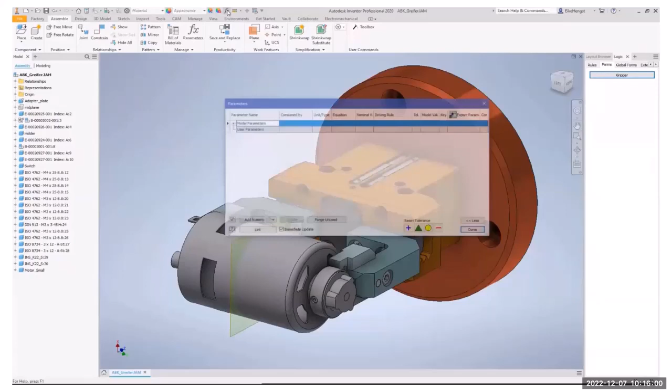We can then go a stage further. We actually create our own custom parameters. Now this allows us to add, for example, a command that we're going to use for the holes. How many holes are in the backplate? And what material are they going to be made of?

And these are additional parameters. They're not actually part of the model at the moment. We're just putting in whatever we need, and we're changing the unit type to either numerical or text. We can then add those changes into the iLogic script.

And here you can see we're adding that parameter, so the number of holes that we added, using the predefined snippet that we've dragged in from the left-hand side. And we're just going to say that equals holes. Holes was the name we gave the parameter.

And then we're just going to say it's either going to be short, and we're going to change the size, and then also the length. So you can see it may look complicated, but once you actually see what's going on in the background, it's actually very, very easy to do.

And the thing is, when you compare how long this is taking with how long it would take to completely remodel that assembly with different components for each version that we want, you're talking minutes here. You could be taking hours to do it the other way around.

So once we finish that, we've got our commands, as it were, or our script. We can then add that to our window that we've created. And again, we can fully customize this. We can make it look a little bit more friendly. We can drag things around, change the tabs, change how many pages we've got.

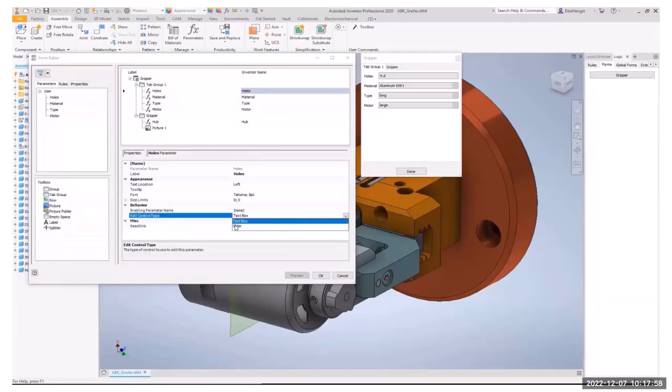So anyway, we're going to choose whether we want sliders or text here. Now when we open our control window, we've got the materials we can change, the sizes, whether the backplate's got 4 holes, 6 holes, or 8 holes. Just by dragging those sliders around, using the drop downs that we used in the command, we can completely reconfigure that assembly.

Now imagine how many permutations we had there. How long would that take to remodel all of those into a different assembly? You're talking days, probably. This has took us minutes. So very, very easy to use and can save an awful lot of time.

Interoperability is another big one, particularly from Revit to Inventor. Previously, if you wanted to share a CAD file from AutoCAD, for example, you'd make it a DXF so other people can read it, which means you've lost all the integrity of the file. If you wanted to put an Inventor file into Revit, you'd have to put it out as a STEP file or something like that, and again you're losing the data you've put into that component.

By using the AnyCAD system, we can literally bring in, for example, a Revit file into Inventor, use that in our Inventor model to position components, look for clashes, which we're going to do in a second, and then push the Inventor model back to Revit. So if any of these change, the corresponding CAD package is also going to update. If we make a change in Revit, the Inventor model or assembly will also update. So you've got that bi-directional link between the files and the CAD packages.

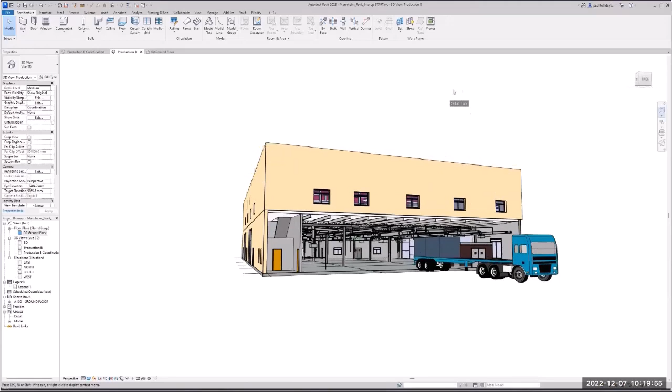Here we've got an example where we've got a factory in Revit, and we've done all the machine assembly in Inventor, and we just want to make sure everything fits in. First, let's have a quick look round so you can see the size of the model. We've got one bay that we've done all the machines for in Inventor, and we just want to place this in and see if it works. So what we now need to do is export our Revit model, just this area, the bay we're working on, into Inventor, and then load the Inventor files to make sure there's no clashes.

Again, very, very easy, all done on the cloud as well. We can share the file. This is our Inventor model, the working bay with all the machinery that we want to put into our factory.

All we have to do now is import or place our Revit model. We're not doing any modifications to the file type, we're not bringing in a converted file. This is the actual Revit file that we've just been looking at in Revit. So once we open that, it's going to give us a choice of the view that we want, because again, it's understanding the Revit views we've selected.

So a little window pops up, and using the drop down, all of the views that we had in our Revit model are available for us to bring through into Inventor. We're just going to go for our simplified version, so we don't need the entire factory, just the work area or the cell that we're working in.

Once that comes in, we're just going to constrain that to the 0, 0, 0 point in the CAD model, so we've got continuity of the placement of the two components. Again, it's very easy - just a right click, place on the 0, 0, 0, and that's now going to be in the right position. We can now unfreeze our Inventor model, just turn those on so we can see what's happening.

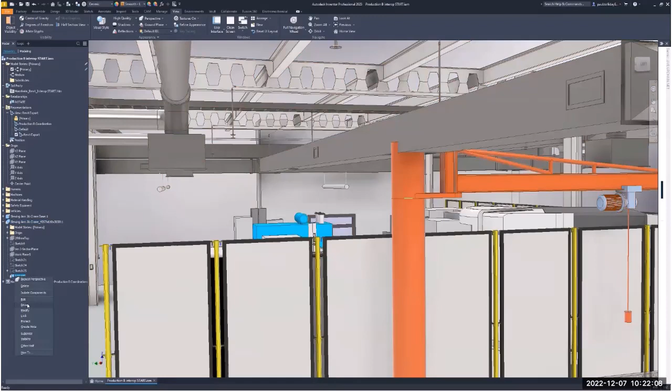So just by using the driven constraints in Inventor, we can activate the crane, and then we can see if it clashes anywhere else in our Revit model. That looks pretty good. It's only that one area, that one piece of ducting, that's causing us the problem.

So what can we do about that? Normally, this would be where you'd have to send an email, a screen print to the person that's in the Revit model or the architectural model and say, I need this change. Well, what we can do is actually send our Inventor model to Revit so we can do the change live in the Revit model.

So what we can do is simplify, because obviously we don't need every nut, bolt, screw and washer that is in our Inventor model. We want a simplified version that gives us just the size and shape of the components. Here we can choose at the bottom to export directly to the Revit file format. So we're not exporting a step file or a dumb solid, as they call it. We're actually using the Inventor model, which also gives us a link, so anything we now change in Revit to cure this problem will also update in Inventor. So we've got that bi-directional link between the two CAD packages.

So back in Revit, all we're going to say is we want to insert our linked file now. And there we have our Inventor model in the Revit model.

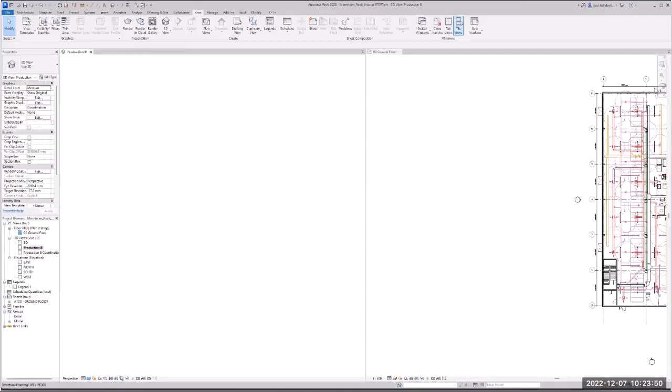So we can make the change now very quickly. We're just going to come to our 2D layout. I'll tile the view so you can see what's happening. So in real time here and live, we're going to go to the right-hand window. We're going to find our assembly that we've just placed in from Inventor. And if we select it, you'll see it highlights on the left-hand side, so we know we've got the correct assembly. We can then see the piece of ducting that's causing the problem.

So all we have to do is activate it. You can see it highlighted now on the left-hand side as well in the 3D model. And then we're just going to change the dimension and push that across by a couple of meters, make that 3000 millimeters, 3 meters. And we can now see we've cured the problem, we've moved the ducting, and it's updated everything in Revit.

If we then go back to Inventor, we'll see, once that's saved, then we can come back into Inventor. We'll see a little lightning strike at the top of the screen which says your model is out of date. Automatically, it's seen that we've made changes. So we just click on the lightning strike. It's going to update the model with the latest version that we've just changed in Revit, and then update the Inventor file. So we can see we've got a complete round trip.

And again, just thinking how much time that would take if we hadn't done that, and we were emailing files off to people and marked up drawings. It's going to take a lot of time and a lot of effort. So you can see, hopefully, how that works a little bit better.

Next thing, again, time-consuming things. If you've got an assembly and you may be looking for information from a client or a supplier, you would be sending out either marked up drawings, emailing them, or PDF files. And if you're really brave, you'd actually be sending them your CAD data, which is obviously a risk because then they can modify things, and your CAD data, your intellectual property, could be changed.

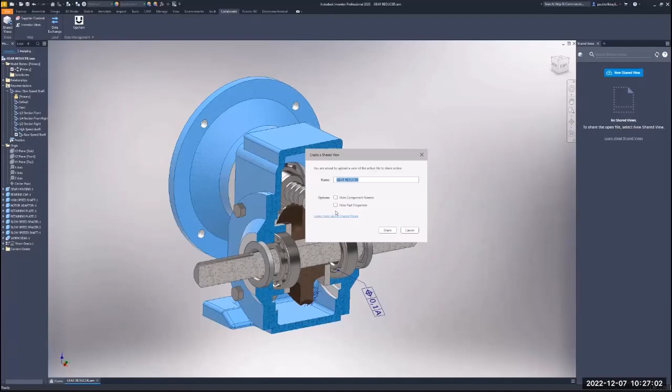And again, you can do this in the Vault if you wanted to. But we're going to create a shared view. All we have to do is say we want to create a new shared view. We can give it a name, and choose whether we hide component names and also the properties of those components. So it's up to you, the level of information you give to the person you're sending this to. I'm just going to say everything, and I'm going to copy the link it's produced, and email that across in a second.

But just so you can see what's happening in the background, we can go for a live view. So it's going to fire up Internet Explorer, load up the file, and here we can now interact with it. So we can zoom, pan, spin it around, and look at pre-saved views if we had them. I've only got the standard view.

But also in our model browser, because we allowed this, we can actually look at individual parts. We can either select it and zoom in, and it's going to highlight the part and ghost out the other parts. So we can pan and zoom around all of those components and find particular parts.

And once we've done that, we can go back to our original model if we want, and actually turn off the visibility of other components. So we might want to see what's inside the model. We can simply select it and turn off the visibility.

But nothing we're doing here can affect your CAD model. So this is purely for visual reference, which makes the files very, very safe to work with. Once we've done that, we can then send that to the person that's interested.

Once we finish with our views, I do get a bit carried away with these, it's actually quite good fun messing about with it, but we can do section views, as I said. We'll just show an example of that. We can explode the assembly.

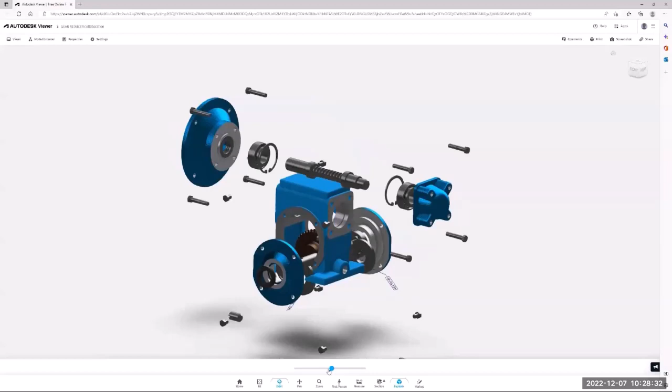And we just do a section. When you're creating your section view, you can drag it real time, same as you would do in Inventor. Not only can we drag it out, we can spin the cutting plane around, and again get the exact section view that we want.

Once we're happy with that, just going to close that down. Now I'm going to generate an email, and send it to myself. So just put my name in there. And then we're going to paste the link that was generated for us in Inventor.

And we're just going to ask the person that we're sending this to take a look, just to make sure the dimensions are correct. Paste the link in, hit send, and the email gets sent.

Once I get notification come through, I can then open the email that's just been sent to me. It's got the link there. Click on the link and it opens up the web browser. Now, again, as I say, this doesn't have to be on your PC. It could be on your iPhone, your iPad, any other tablet you're working with, as long as you've got an internet connection. So now we've got that, we can come in here.

We're going to just make a little markup so we can see what needs to be looked at, and create a section view. Then we're going to put some annotation in here as well via our markup. I'm just going to drag an area around the area of concern. We're going to add a little arrow, and then put some text just to say we want to look at the dimensions or the tolerance build-up in this assembly. We've got a spacer in there, and we want to make sure that bearing doesn't push against the spacer.

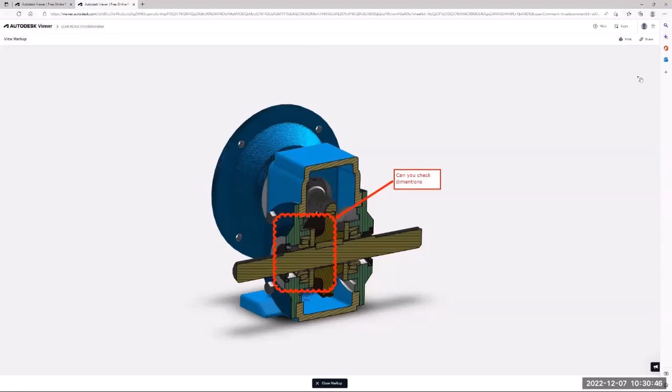Once I've created my copy there on my markup, when I come back into Inventor, just do a refresh, and we can see that we've now got a comment that has been added to our original markup. So just to refresh to make sure we've got the latest one, if we now click on there, the markup we just created can be viewed.

So I've now got the information back from the client, the customer, the engineer, whoever it may be that I've sent that information to. And I can see that they've said, okay, we've got a problem with this area. Can you just check on the dimensions and give instructions?

So moving forward in time, we say, okay, we've had a look at this. Well, I'm quite happy with it. We can simply say that our comment is resolved. It takes it away from live comments, but also keeps it as a reminder, so you've got a history for up to 30 days of what's actually changed. The information has gone backwards and forwards between the two people that are doing this.

Seem useful? Yeah. So any questions, or if you're getting bored, just tell me.

Okay, so moving on then, the extended capabilities. So Inventor tolerance analysis, the thing we were just talking about with our previous video we just looked at, factory design utilities, Nastran, Inventor CAM, and Inventor Nesting.

Does anybody use any of these at the moment? Yep, you do. Which one? I went for nesting. Yeah, we have used it for nesting. Yeah, we have a possibility. Okay, that's good.

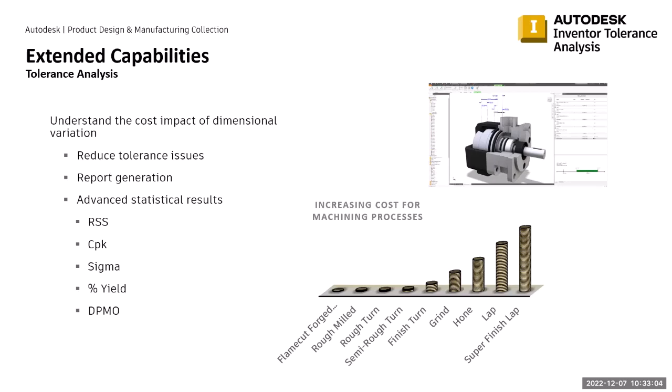So what we can do is use our tolerance analysis. We've got our same component, and as in our previous markup, we just saw someone's worried about the dimensions. So once we go into tolerance analysis, we can create what is called a stack up. And the first thing it's going to ask us is, well, where's the critical dimension that you want to talk about or you want to check?

And what we're doing is checking the gap between the spacer and the casing and the bearing in this instance. By selecting that, it will now look at all the constraints that are along that shaft and that component, and it will automatically find all of the constraints that could affect the dimension or the placement of that component. So that gives us our set, as it were.

We can then come across into the tolerance analysis area, and we actually see what the tolerances are going to be. So we've got our worst case scenario at the bottom. I'm going to actually set a target here. So I want it to be plus or minus, and we just add 0.25 into our dialog there. Just let that happen.

Now that's going to tell me what's the chances, worst case scenario, of none of these components fitting together. Now we can actually find the parts that are causing the problem. So straight away we can see gear housing and the gear 000 IAM are causing the biggest problem. So they've probably got the tighter tolerance on there that can't be achieved, or it could be too loose even.

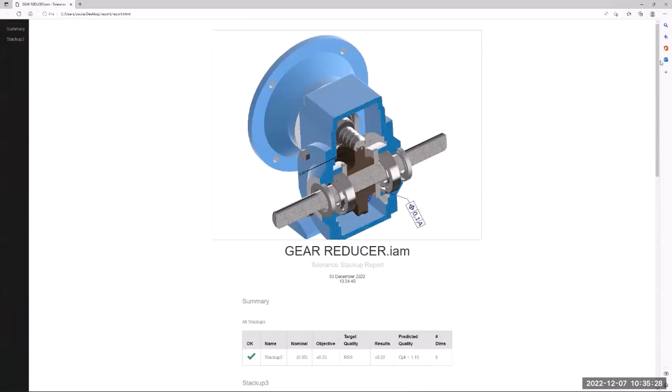We can then output a report that gives us all of the information and why we made this decision. We could forward this to the supplier, and then you've effectively solved the problem very, very quickly. Obviously, that's a very top level guide through it. There's an awful lot more you can do in there, and if you wanted to see more, give me a shout afterwards and we can go into a bit more depth.

One question. Is it possible to connect it with the cost analysis? Because all these tolerances affect the cost, and some of them, yeah, like you showed this diagram at the beginning. Is it possible to use it?

There would be a way if you exported it into an Excel spreadsheet, so you can put in rules in your spreadsheet that could update from the information that's coming from there. So yeah, you could do that. I can show you afterwards, we'll do a little walkthrough.

And second question, this tolerance analysis, it means that all these 3D dimensions should be, let's say, defined in 3D? Yeah, what you can do, you can obviously use the dimensions that you already have in your model, your parametric dimensions, but you can use 3D annotation now as well.

So you've got your 3D dimensions, so you can see on there I've got the one dimension, but if you're using 3D annotations, that will then update dynamically with the changes that you've made to the tolerance analysis, which will then also update in your drawings as well, via the 3D dimensions. So yeah, I'd say I can show you more of that in detail afterwards.

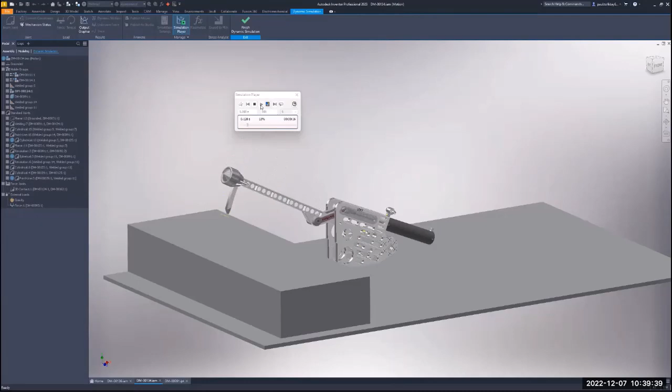Once it hits the deck, we can stop the motion, because we don't need any more motion at that particular point. Then we're going to go to our output graph, and we can see the moment of impact on that analysis, on that axe. So all we can do is search for the maximum force that was applied to the end of that axe.

And then we're going to export all of those settings, all those forces into the 3D model, which is the axe arm. Once we've done that, and again, we're still just in normal Inventor analysis here, we're going to go to our standard Inventor analysis.

Take a little time to catch up.

So into stress analysis, we're going to create a new study. And because it understands the simulation we've just done and we exported the files, we've got a button we can press and just say, bring through all of the motion loads from the simulation analysis. So now it's not a case of us guessing where the forces are going to be. These are the forces that were generated from a motion simulation.

Once we've gone through that, we can add materials, which we've done in the background. I'm just going to take off the pointers. We can mesh the entire model, and then we're going to do our simulation. Just take a couple of seconds.

And once we get the results, we can now see very little red, keeping it simple, on the model. So, yep, that's going to survive one hit. So this is the point where we say, okay, how many hits can I get out of this? And this is where we would normally be exporting the files to another package.

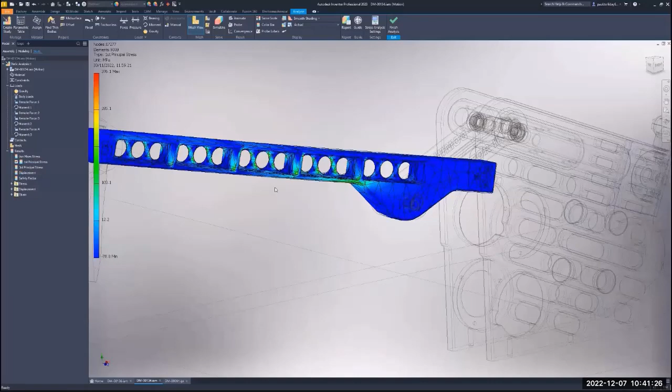What we can do now, though, is go to Nastran in CAD built into Inventor. And because we've already done all of the analysis on here, we can bring through all of that data into Nastran, so we haven't got to recreate all of that information. Just wait for this to update.

So now, into Nastran, we'll see the information down the left-hand side that it's going to bring through that's already embedded in the model. All we need to do now is make a few changes to what we actually want this to do for us. So we're going to create a simulation.

Takes a little while to catch up here. And here we're going to define the material it's going to be made of. And then we want to understand what's happening with that material.

So we're going to go from our static analysis, which is the default. And now we're going to tell it that we want to do our fatigue analysis on that component.

So we're still making very little changes to what's happening in the background here. With all of the main criteria, the forces, etc., have been added via the stress we've already done. We can then look at the fatigue of the material, and we can tell it what we actually want to do here.

Once that's done, this table is basically telling Nastran that we want to have 3 stages: 0, halfway through, and complete. And it's going to be fully back, fully down, fully back. So it's going to do a cycle, effectively, of the axe moving in its range of motion.

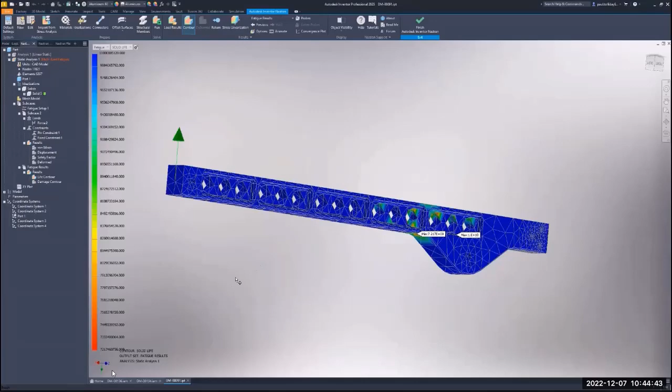So we actually could be in the stage where we're stopping ourselves from over-engineering now. We could bring that back. I'm not going to do more than 10,000 hits for this axe in this competition, so as long as it lasts that long, that's all I need. So you can see really, really time saving.

Again, that is just scratching the surface of what Nastran can do, but it gives you an idea of how it works in Inventor with the products you've already got in there. I'm doing this for time.

Other areas you've got is in the CAM side of things. You've got multi-axis operations, adaptive clearing, turning and milling. Pretty standard for all of the tooling environments there. I think Rickard is going to do quite a lot of talking about the capabilities of CAM in Fusion later on.

But again, you've got exactly the same information here, the same benefits, because everything's built into the program. Once you've set up your tool paths etc., you may change the model, make a slight change to a parameter. This is then going to update and refresh and show you where you've got problems if you have any. So again, massive time savers.

Nesting. So again, you could probably tell me about this as well. Very, very useful. Do you find it useful when you've used it so far? Yeah, well, how you use it itself.

And again, it's one of those things when you're dealing with sheet metal components. Everyone models them, great, okay, but at some point we do need to cut these out from a sheet of steel or plastic or whatever it may be. So we want to make the most efficient use of this material. We can actually put the parts in and say this is going to be the most efficient use of that material. That can then be generated into the cutting paths in the CAM system, and you export the whole package directly to your CNC or whatever machine or laser cutter that you're working with.

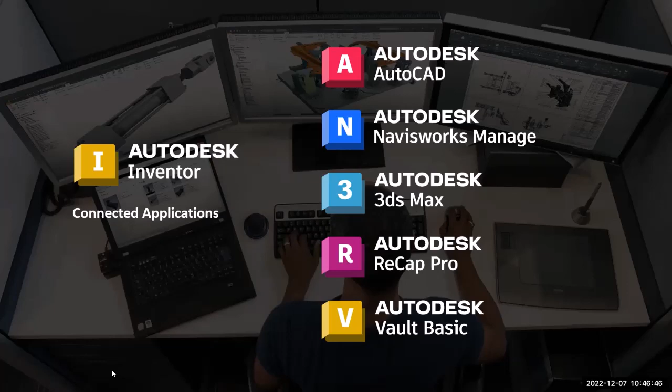Connected applications. As we've said before, Inventor works seamlessly with AutoCAD, Navisworks Manage, 3ds Max, ReCap Pro, and Vault Basic. Also, it's compatible with Vault Professional as well. But to go through some of those, these are the interesting areas.

So AutoCAD and Inventor, again, this is a time-saving thing. We may have a lot of drawings that we've done in AutoCAD. We move across to Inventor. What happens to all that data? Have you got to recreate that from scratch? Well, no, you haven't. What you can do is bring through the AutoCAD DWG into Inventor and use that to create your 3D model. And again, working on this relationship between two packages, if you then make a change to the AutoCAD drawing, because we've got a link in Inventor to that drawing, it will update your 3D model automatically if you want it to.

And again, you have a choice here where the lightning strike icon comes up and says this has changed. You can actually say, well, actually, I know that's changed, I don't want my model to change, and we can leave it as it is, or we can hit the update button and it will remodel the 3D solid for us automatically.

Moving on to Navisworks. This is a great piece of software. Basically, if you're doing your factory layout, as we showed in the beginning here when doing the 3D between architectural and Inventor, but also if you're doing the AutoCAD to Inventor factory design layout, we can then put this into Navisworks, which allows us to do things like walking around, check everything's okay, clash detection for our components, and also we can work out how long it's going to take to build stages of build that we want for the 3D model.

Just to show you, here we have Navisworks - get the two mixed up. From our 3D model, it doesn't matter if it's come from Revit, Inventor, or AutoCAD factory design, we can walk around, but more importantly select areas where we want to check for clashes between components. By selecting our area, it's now going to show us the areas that have a problem. So we see our ducting is infringing on the area we don't want anything inside.

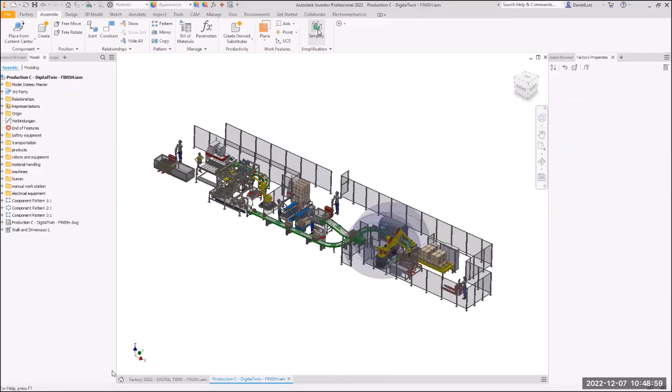We can come straight back into our Inventor and have a look at the area that's going to be a problem. We'll do a shorter version of what we did earlier, but we're going to export this now into Revit, because the Revit model is the part causing the problem, not the Inventor model. So exactly as before, we export it out, take it into Revit, and use Revit to make the changes.

I'll skip through this bit quite quickly, because then we'll go back in and show you what's happened in the final product.

Back in Revit, we brought our model through. We're going to do a refresh just to make sure we've got the latest version in there. As before, we're going to find the parts causing our problem, move them in the Revit model, and then update the Inventor model after that. It could be a case of changing dimensions, moving a component, or revolving it, whatever causes the result we want.

We're just going to drag that across, move it from our production cell, and move the other components completely out of the way. Once we've done that, same as before, we're going to save it, then do the refresh. We've got the lightning strike in Inventor, going to update our model. Once it's updated, we can come back in the other direction. Let's make this update.

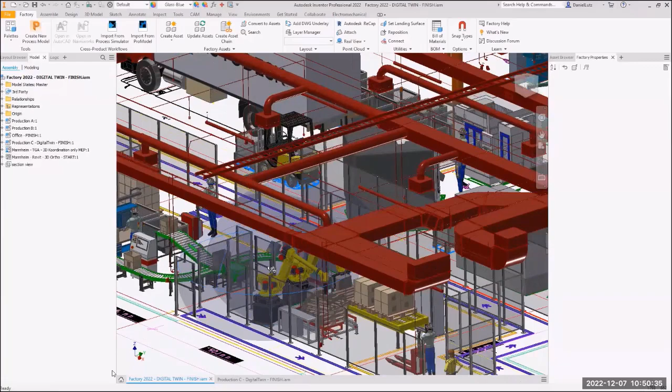So there we can see we've actually made the change, so we can see the effect in our 3D model. Come back into Navisworks, we can refresh the clash analysis or detection we did earlier, and we'll now see that we've cured the problem we had initially. And there we see, the clash is gone. It's going to now just give us information on any other clashes, so we can do the same procedure to go through those as well.

Another area is electrical. We've got AutoCAD Electrical, which we can use for electrical design, schematics, etc. We can then bring that into Inventor, do 3D models of that, do cable routing, cable and harness, and nail board drawings and schematics directly from Inventor. But again, we've got that link with the original AutoCAD Electrical functionality, so any changes made there will push forward through into Inventor.

Getting towards the end now, but bringing a lot of these things together, what we've got is a laser scanner inside a building, which can create a point cloud, and we can then bring that through using ReCap Pro. We can measure, mark up, and bring it into the 3D CAD model. So the factory layout we've done, we can bring that point cloud in, and then do clash detection from the physical properties of the building used in the scan with the machinery and ducting, etc., that we're putting in from the model.

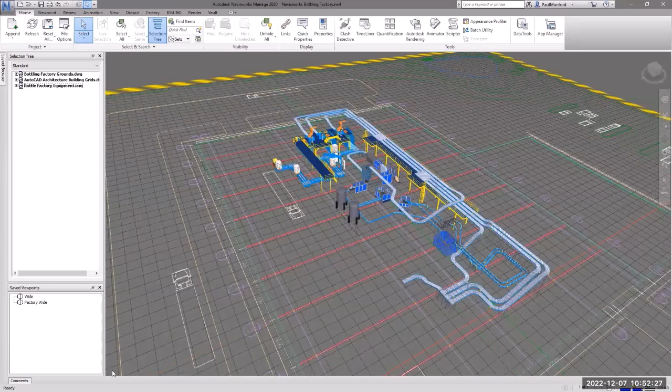Obviously we can then affect our factory layout - if we've got any problems, we may need to move something. We've actually got a concrete post that we didn't realize was in the building, but now the 3D point cloud from the laser scan has brought that information through, and we can now do a full test.

Just as a side note, when it comes to ReCap Pro, we see here a laser scanner has been used to create the 3D model in the point cloud. But you can actually, and I've done this myself - I'm a qualified drone pilot - a friend of mine's got a barn that he was wanting to convert into a house, and he needed to put a lot of steelwork in.

In the space of about 3 hours, I put my drone up, took about 300 pictures in a 360-degree spin around the building, put those pictures into ReCap Pro, and it used those pictures to create a 3D point cloud. We used Advance Steel to do all the steel work inside of his barn, and that's by using a 300-pound drone.

Obviously it's great for external things. If you're doing the hull of a ship, you're not going to be able to do it with a drone—you need a laser scanner—but the options are there, and again, ease of use is fantastic.

Finally, once you've done all this design throughout all of the packages, you might want to do some marketing material, put this forward as a quote, or show a local committee how things are going to fit together, how production is going to work, how much quicker and better it's going to be. We can use 3D Studio Max directly from all of the CAD models we've created in the background to create our own marketing material.

Lastly, and I'm not going to do very much here because Rickard is going to carry on with this, is Inventor and Fusion 360. One of the key things I've picked out is generative design—we can seamlessly create a 3D model in Inventor, push that across to Fusion 360, and then use generative design to give us a cost saving or a stronger version of the model we've created. Rickard will do much more detail on that, I'd imagine.

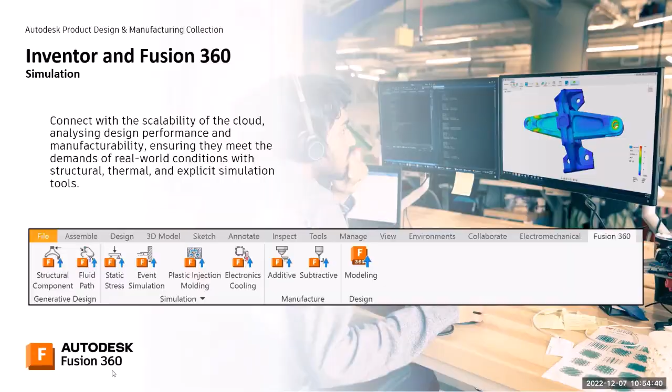That completes my presentation. Hopefully you found that useful. I'm here all day if you need more questions later on, but thank you very much.

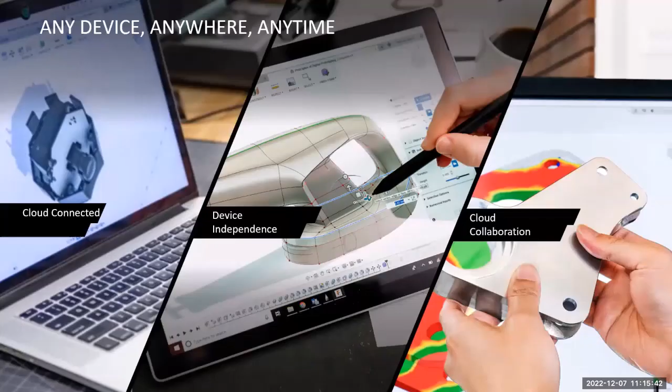Fusion 360 is a cloud-based software, if you read on the internet—but the software is installed on your client, and it is cloud connected. All data I create in Fusion 360 gets pushed up to the cloud, the Fusion team. So it's possible to share data in a similar way that Paul just showed you with Inventor, and we can also cooperate with data created in Inventor and push it into the Fusion team or the cloud.

And then we continue to work with it in Fusion 360. I can see a trend that a lot of customers work with Inventor and also start to cooperate with Fusion 360 through the cloud. Fusion 360 is device independent, so you can work on a Mac or a PC, or on a tablet, or read the data on a mobile phone because it's stored in the cloud.

And it's easy to collaborate—just like Paul showed you from Inventor, we can do similar things from Fusion 360. As I said, it's no problem working with Inventor, but also from other software we can load data. If you're working with SolidWorks, for example, you can load the native SolidWorks file into the cloud and open it in Fusion 360. If you update the SolidWorks file, it will be updated in Fusion as well. That's the AnyCAD functionality, working similarly to Inventor. Good to know.

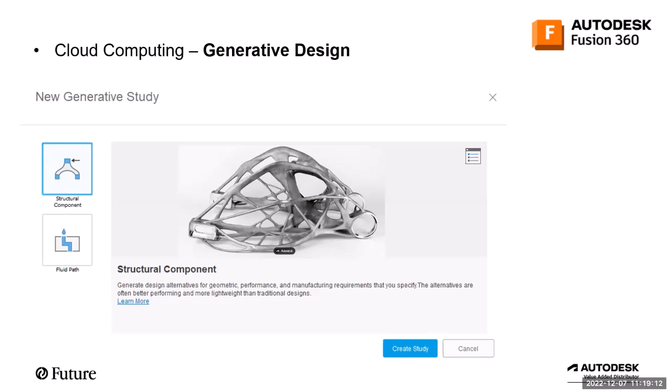There is something also under preview at the moment called automated modeling. It is similar to generative design, but without the simulation. It could automatically generate CAD data between different faces, the same way generative design could, but this is artificial intelligence put into Fusion 360. There is a lot of new thinking with Fusion 360 with artificial intelligence and cloud computing.

Going to Autodesk University in New Orleans or online this fall, you could hear about a top secret project at Autodesk named Bluebird. Autodesk did tell that they are working on a project creating 2D drawings fully automatic. The intention is to be able to upload your components into the cloud, and then download an automatically created 2D drawing. It should be possible to teach the system how you would like the flavor of your 2D drawings with artificial intelligence.

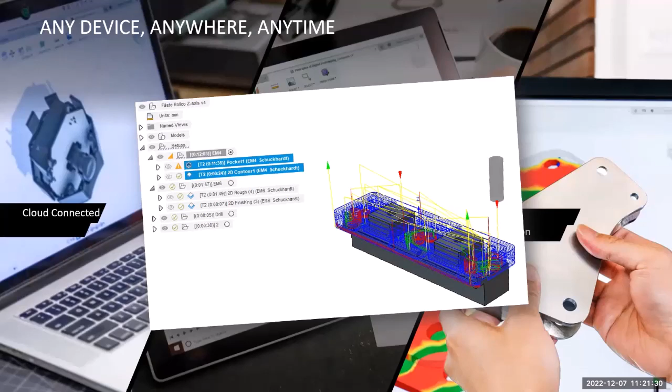Also at Autodesk University, there was an announcement of a secret project for CAM calculation, also taking part up in the cloud. Maybe in the future, I don't know what time schedule it will be, but there are tests going on at Autodesk, uploading the CAD model into the cloud, and then the calculation of the toolpath will be done automatically with artificial intelligence in the cloud.

That means Fusion 360 is cloud connected, device independent, and cloud collaboration. We hear about that if we look at the internet, but that's not what's about the cloud for Fusion 360. With Fusion 360, the cloud is about auto-generating data for us. We upload a lot of parameters, and then we can download a CAD file, 2D drawings, or maybe also in the future a CAM file. So that is really impressive.

So I would say the future is here, and it runs on Fusion 360. Fusion 360, that is the next generation CAD and CAM software, I would like to say.

Good. Let's move on to Fusion 360 and some CAD and CAM stuff.

We had an update of Fusion in November. We normally have one update every month of Fusion 360. It's pushed from the cloud, so we don't need to do anything else than restart the software, and it will be automatically updated. In the November update, Autodesk announced that in March 2023, we will no longer fully support some OS listed below. It's good to notice that it doesn't mean it will stop working directly - it means we don't have full support for the OS if something happens with the OS support. You can find this information inside Fusion 360 under the question mark and what's new. You will always find the new stuff in Fusion under there.

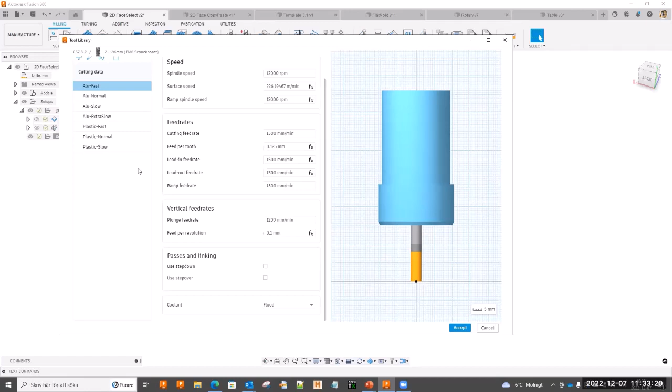So that makes life a little bit easier for the tool database. In the past, we had to create a copy of all the tools if we were using aluminium or steel or other materials, but today we use the preset. So that is a great benefit.

And also, if you look at the standard libraries included in the installation, you will find drilling tools and a lot of parameters for different materials.

So we can see in this November update, there are a lot of new icons everywhere in Fusion. If we look at the coolant settings, there are icons for the coolant, almost everywhere in Fusion you will find icons instead of only text.

It's a small update, but it could help you work faster looking at the icons instead of reading the text when you're doing something.

Also in Fusion, there is a new way of selecting the face on a part. That is a good time saver also when you're doing your CAM preparation.

So this is a preview, but it is marked with a green eye. It's a public preview, you can turn it on and it works just perfect. Maybe they will change or add extra functionality here before they release it, but it's very fast.

So I will show it on this part. It's an aluminium part, and let's say we will machine it in a Datron milling machine with a vacuum table, with a paper board on top of the vacuum table. It means it works as a waste board.

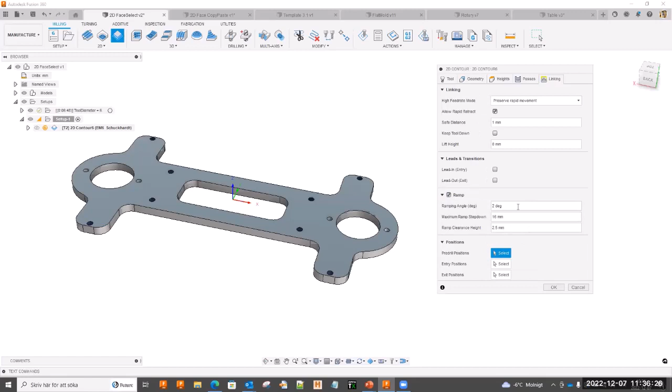So on the set height, maybe 0.3 through the cardboard, and then I will remove my lead in, lead out. I will put on ramp, 1 millimeter at a time, maybe like this. And directly I will see my toolpath like this.

So good to note, it is those contours of the holes where the tool doesn't fit, it will not try to machine that. In the past, if I selected those contours, well, then I had a toolpath on it anyway. So this is much more intelligent.

I can do similar work with drilling. If I select my drilling tool, maybe I just will mark it with a small drill, normal preset. And instead of clicking on the cylinders, the holes I would like to machine, it's possible to say I would like to select the holes from a diameter range. So let's say I will find all the holes from 2 to 10 millimeter in diameter like this.

And then I just will pre-drill it with a small drill, and of course I select the cycle just like normal. And then it's done. So it could be done fairly easy for this part, just cutting the part and then just mark the holes like this. Super fast.

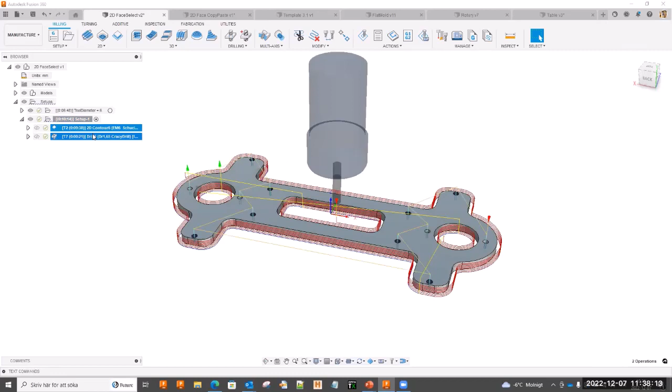So this means I did the machining for this one, and maybe I should create a different part, a part like this, same material, maybe using the same tool. A good tip could be to simply select those toolpaths, copy them, and then paste them into a different model.

Fusion tells me it's not calculated, so if I just generate those toolpaths, it will generate the drilling automatically. For the 2D contour, I need to select the face, the face contour right there, and then it will be machined exactly the same way. So that is a quick way to copy and paste your toolpath between different models to get the same result.

But doing that, you can also create your own file where you save all your toolpaths. This is a good way of working in Fusion or Inventor. So I have created a setup for my machine with an end mill 6, and here I save different toolpaths, different scenarios, and then I can simply copy and paste them into a different model and machine it from there. Saves a lot of time, and I know exactly what's going to happen in my milling machine.

Also, there is an API in Fusion 360 worth mentioning. You can create scripts for basic stuff. It's not like iLogic inside Inventor that Paul showed you an hour ago. In Fusion, there's Python scripting, which is more or less programming, so you need to be a little bit more skilled than using it in Inventor. But on the other hand, there's a lot of information about it.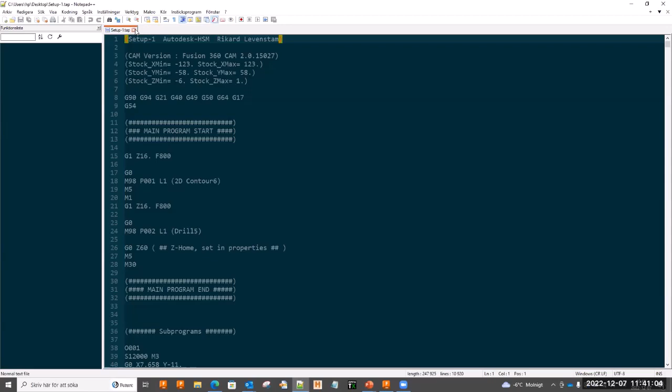So it makes life a little bit easier for me instead of using the normal post-processing tab here, selecting the post-processor and what operation I would like to post. But it depends on how you work, of course. It's just an example of the scripting you can do in Fusion.

So let's look into the flow strategy, that's also a public preview. If I look at a part like this one, for 3-axis milling or 5-axis milling, the flow strategy is an excellent strategy to machine a selected face. This is the old flow strategy, where we select a face on the model, and the strategy will machine with a tool and the contact point within this region.

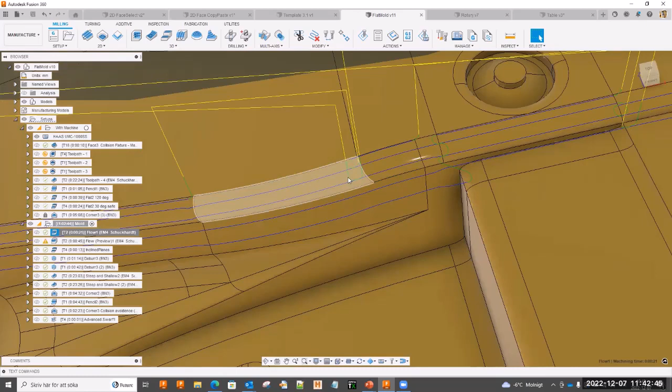This strategy calculates directly on the surface model, so it depends on the U or V direction of the surface. I can simply click like this, and also I have to decide how many toolpaths, how many step overs I would like on the surface. That makes it difficult to get the correct step over in millimeters - that's been an issue in the past. Also, if the quality of the model or surfaces is slightly different, the toolpath will cut or end badly like this, giving quite bad surface quality on the machined part.

So with the new flow strategy instead, I still select the faces like in the past, but I don't have to decide if I should machine along or across, because that's handled by selecting the isoparametric direction of the surface, U or V direction. I also say I'd like a step over value in millimeters instead of number of step overs, and the quality of the toolpath calculation is much better - it stays together instead of breaking the toolpath like in the past. The quality of the machined part is much better, I'd say.

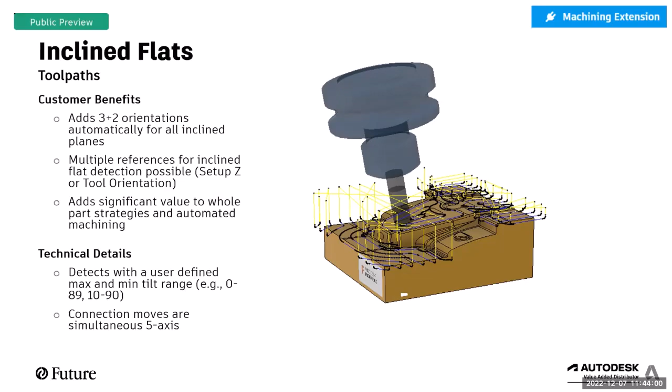There's a strategy called inclined flats. It will be placed in the Machining Extension in the future, but at the moment, what is under preview, it's free for everyone. It is a 3+2 axis toolpath. So when I calculate the toolpath, I just tell the system to machine it like normal, but on the multi-axis tab, I can tell the system that we should incline flats, and it will find all the directions automatically, but I can limit the tilting of the machine, in this case to 30 degrees.

That means if I simulate this, on top it is a 3-axis toolpath because the top surface is absolutely flat. On this inclined plane, that is 3+2 axis milling. So that is done automatically in the same toolpath. And the transition from the straight section to this 3+2 axis section will be a 5-axis connection.

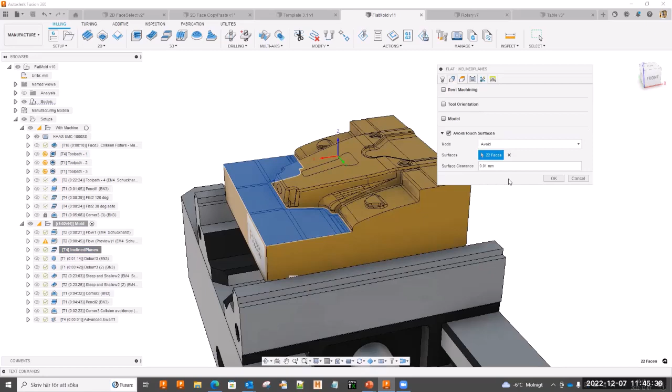This makes life really easy if you have a machine, a part with flat planes in different angles. In the past, you had to select each and every plane and create a separate toolpath for all the different directions, but now it's done automatically. Also, it's possible to exclude areas. In this example, I have excluded 22 surfaces, or I can add even more surfaces I would like to exclude, maybe because I want to machine them with a different tool. So that's possible, but it's a time saver for sure, and it makes it more automatic for us.

There's also a preview called deburr, for deburring the model. This is placed under the 3D strategies, with deburr on the bottom here. What it does is I simply select the model, or I simply don't select anything, but here I exclude those vertical walls.

It is also possible for me to say this should be a 5-axis deburring operation, or it should be a 3-axis operation, and I can again limit the tilting of the machine like this. So doing that with a short ball nose tool, if I simulate this, we'll see this is a 3-axis deburring, just cutting the sharp edge with the value I entered in the strategy.

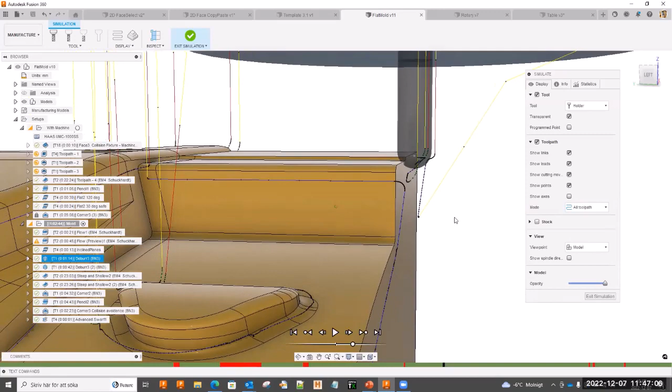But here it will machine it 5-axis, because otherwise it would give collision. Now you can see it tells me there's a lot of collision here with the stock, but that's because I didn't rough it, so it looks like this. Otherwise we will get an indication if it's safe or not on the bottom line. So this is strictly for deburring, but it will save a lot of time for me.

For steep and shallow, we have something called open pockets. Again, in Fusion, the steep and shallow strategy will calculate both steep and shallow areas automatically. It could give me closed segments in this flat area, and this could give me bad surface finishing on the part, because the step over is slightly larger in this sharp geometry of the toolpath.

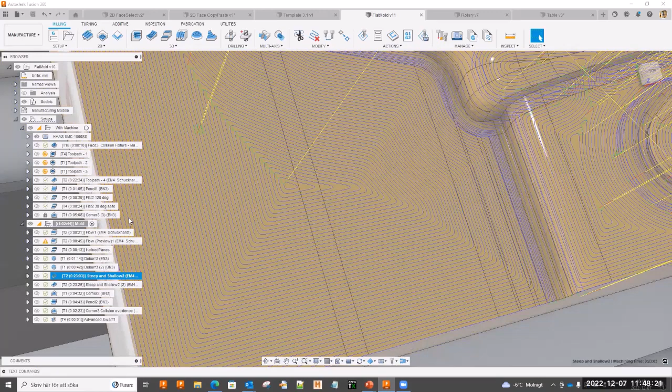So what I do with the new settings inside steep and shallow, a small update, is say it should be open pockets when I'm using the scallop, and that means the toolpath will be open like this. This is a small difference maybe, but on the surface quality of the part it's a huge difference. That's a good example of what's going on in the development in Fusion, and it's possible to use that through the preview functionality.

There's a new strategy, also a preview, called corner rest milling. If you're working with injection molding tools or other parts where you have rest machining because of small radii, and you would like to move on to a smaller and smaller tool, today you can use the pencil strategy. So you have a pencil right somewhere here. Maybe I'm blind. Pencil, there we are, pencil strategy.

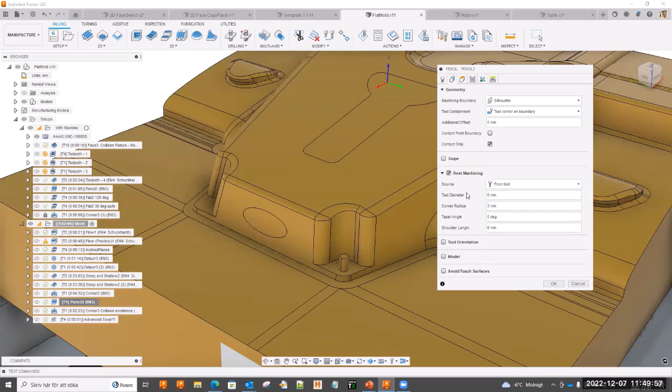The pencil strategy will ask you if you would like to do rest machining from a tool. You tell it you previously used a 6mm diameter tool, and then the system will find the rest material from this tool to the tool you're using, a 3mm in this case. That's why we only get toolpath in the corners like this.

The problem with the pencil strategy is sometimes it gives me a really bad result like this, more or less rubbish, I would say. But with the new corner strategy, it will create a much better quality toolpath. This is a toolpath from PowerMill, a copy of the toolpath from PowerMill, but in the future we will see a new pencil strategy that is even better than what we have in PowerMill.

Also, with the corner strategy, it's possible to activate something called collision avoidance. So if I'm machining 3-axis, that's what vertical means, and activate collision avoidance, it will automatically avoid collision by tilting the rotary axis for me, fully automatic. This makes it really easy to calculate the 5-axis toolpath in Fusion instead of doing it in a more complicated way in some other software.

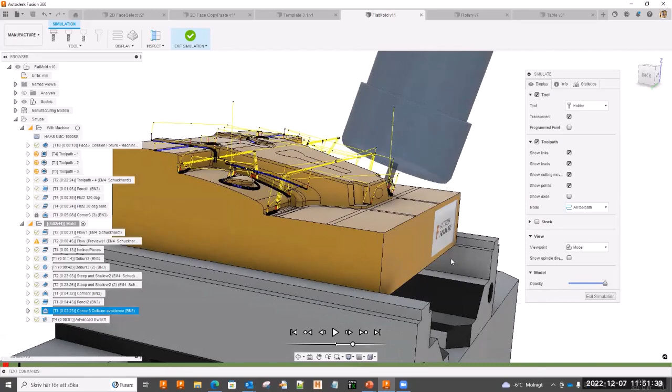So this corner with collision avoidance, we can see in areas like this it is automatically tilting the tool for us, 5 axes simultaneously or 3+2 axes, if that's enough.

There are some strategies called rotary pockets and rotary contour, that are also in the machining extension. But this is more or less magic, because PowerMill, as I said, is really advanced software, but in Fusion it's much more easy to use.

So if I select the rotary pocket strategy and tell the system that my rotary axis is along the part, I select the milling tool I would like to use. In the passes, of course, I have to enter the step over and step down, but otherwise I just hit OK to calculate the toolpath, and it will find all the pockets fully automatic, in 5 axes. You can see the result directly here. It finds this pocket and all 3 pockets for this one.

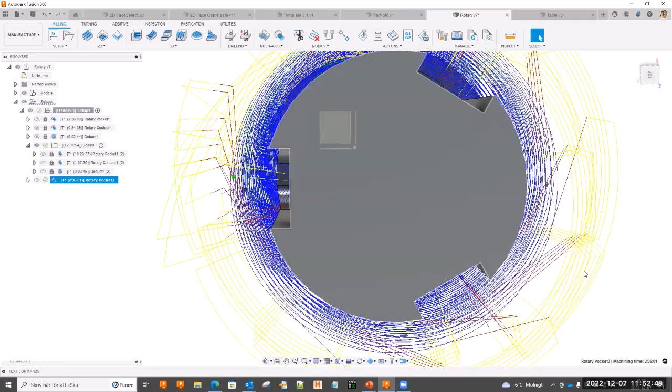I can do exactly the same in PowerMill, but it requires a lot more work from myself. So this is the way to go with Fusion, automatic CAM, and maybe in the future in the cloud.

Same for the rotary contour. It's a similar setup, but it will find the contour in 5 axes for me. So it doesn't need to be a cylinder like this, it could be a conical shape or an irregular shape of the model, and it will generate the toolpath anyway.

We also have collision checking in Fusion. This is a topic when you're machining 5 axes, of course. So if I look into my strategies, my flat mold like this, and I create a simple toolpath like this, this is just a face cut.

Of course, it will collide if I position the tool here, you can see it will collide with a fixture, and it will alarm today with the basic functionality of Fusion. It will alarm if we collide with a fixture.

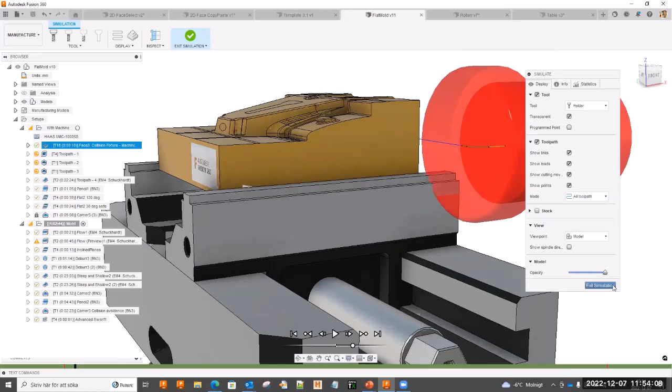But if I simulate this with a machine, because in this setup I have added the information of the machine - in this case I selected the Haas milling machine - and I simulate with the simulation with machine, it will be possible to see the whole milling machine like this. It will position the machine how it will be positioned in real life.

I can turn off the base of the machine to make it easier, and if I calculate here, it marks in red and tells me that the Z-axis collides. So this is automatic collision checking with machine parts.

So that's the future in Fusion. Today, with this preview, it simulates a single toolpath, so where this toolpath ends with the green arrow, the next toolpath starts right here. The move in between is taken care of by the post-processor.

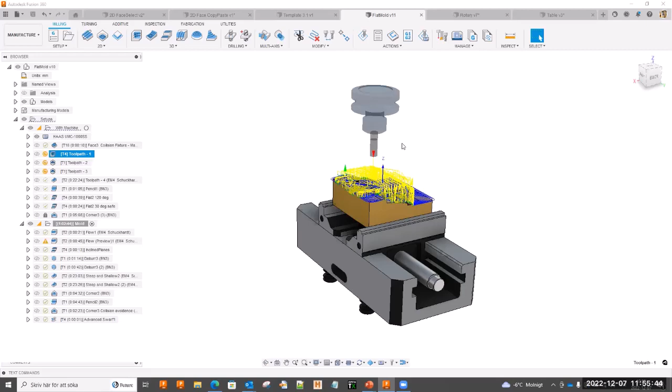But in the near future, beginning of next year, we will also be able to simulate that movement inside Fusion 360, and we will use the post-processor to do that simulation. This is really, really advanced stuff, things we've never done in PowerMill, and I've not seen it in other CAM software either. So this is the next generation thinking of machine simulation.

Also in the November update, of course, we updated a lot of post-processors. You are free to download post-processors from our library on the internet. It's the same post-processor in Fusion 360 as inside Inventor CAM. But if you need help adjusting post-processors, we're here for you and we can help doing that.

Good, that was everything I had time to do in this presentation, and I hope you found it interesting. If you have more questions about CAM, you're free to ask here or after the meeting. Thank you very much.

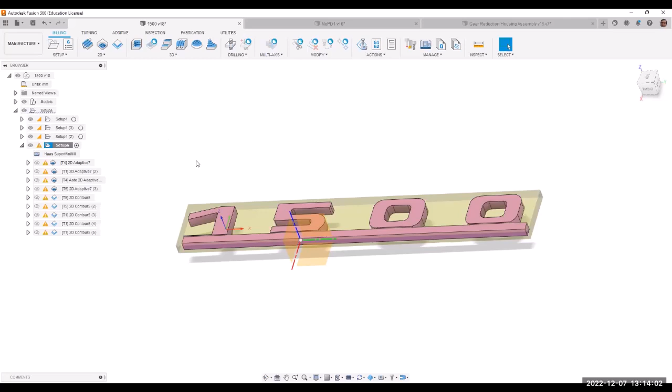Ja üks müüt veel, mille lõpetuseks tahaksin ümber lükata - Fusion ei vaja töötamiseks alati internetiühendust. Tegelikult saad Fusioniga töötada ka ilma internetita, lihtsalt siis, kui internetiühendus tekib, laaditakse failid pilve üles.

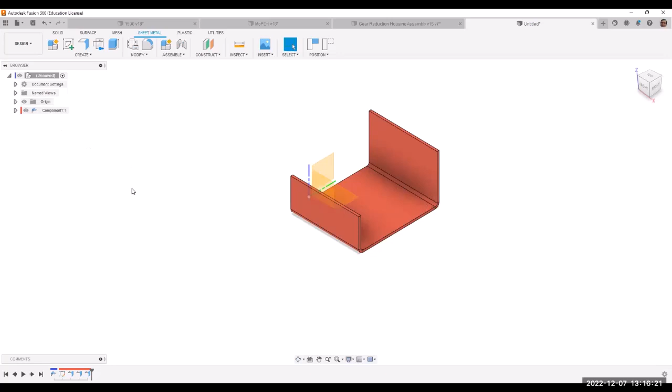Nüüd näiteks ma teen sinna ühe tavalise solid keha. Panen revert position, lähen joonistan sinna mingisuguse teise keha, tavalise solidi, näiteks sellise. Läheme teeme tast mingisuguse, võtame sealt symmetric, nii kindlasti, et oleks meil keha, body.

Nii, ja kui ma nüüd seda elukat üritan liigutada, tema ei liigu. See on esimene oluline asi selles mõttes, see on body. Vaatame, ma üritan korra sisse zoomida, niimoodi, näete, ühesõnaga Fusionis, kuidas mina seda õpetan, vähemalt seda osa, asi on väga lihtne, tuleb jälgida neid ikoone, mis meil on data browseris. Kui meil on data browseris, näete see ikoon, kus meil on risttahukad üksteise seljas, see ütleb, et tegemist on peakomponendiga, main component in English.

Ja sama sees elavad meil teised komponendid. Näete, kui ma data browserist vaatan oma kehade kataloogi, näete, keha ees olev ikoon on selline. Kehad ei liigu, tema on meil keha, inglise keeles body, mõnikord ütleme eesti keeles ka mudel, ta ei liigu. Ma tahaksin teda liigutada, kui ma tahaksin move käsuga, aga see on niimoodi, et tema jõuga liigutamine, see ei ole see, kuidas Fusion on mõeldud töötama. Fusion on mõeldud töötama niimoodi, et komponent liigub.

Vabandust, teeme ühe näite veel, nii jätkan. Ma vist hävitan selle keha ära üldse. Kas näiteks, kas teatakse, mis vahe on käskudel delete ja remove?

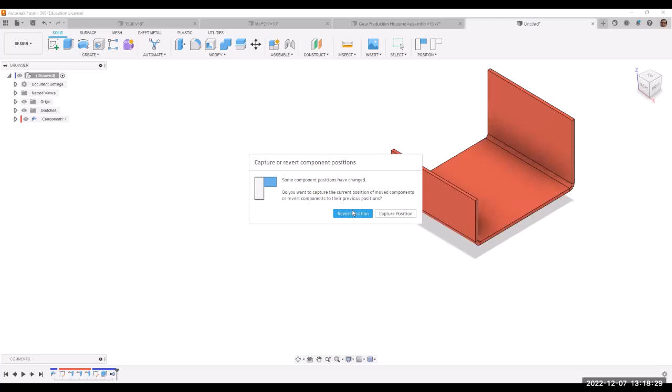Ma teen siia kiirelt sellise asja, et läheme teeme sinna ikkagi. Kui teile sobib, me teeme seda. Ma nüüd natukene rabistan, teeme sinna kiiresti ava sisse, näiteks selle samase ava 10 milli, suvalise koha peale las olla, näete, meil tegime oma lehtmetalli. Ahah, ma tegelikult tahaks näidata, mida tähendab lehtmetalldetail. Lehtmetalldetail, näete, on selline asi, et seda lehtmetalldetailis saab teha näiteks pinnalaotuse.

Pinnalaotuse niimoodi, selle pinnalaotuse järgi saab teha DXF-faili, selle saad saata otse laserpinki, painutusse, mida vaja on. Nii, ma panen ta kinni, see on see, miks ta on lehtmetalldetail. Nii, nüüd ma tahan siia sisse tuua ühe välise komponendi. Ma toon siia kiiresti sisse välise komponendi, Fusion kasutab siis insert McMaster-Carr, nii-öelda seda, lähme toome sealt ühe

Meetrik, M10 boldi sisse. Nii, M10 meetrik, ma võtan suvalise, andke andeks mulle, selles mõttes, meil tegutseme siin, meil on ikkagi aja peale, las olla, nüüd võtsin mingi täiesti vale asja. Headless ei ole päris õige asi.

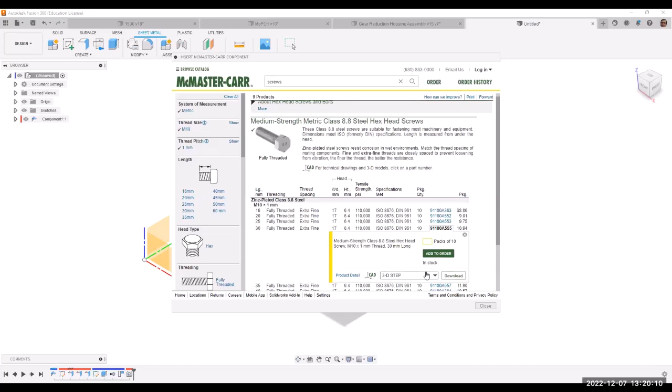Nii, vaatame, kus ma näen neid, kus 12 millimeetrit, see ei sobi millegi pärast. No võtame selle sama siit. Nii, vaatame, kas me saame tema CAD mudeli, 3D step download sobib praeguseks hetkeks. Näete, teen välise komponendi, toome sisse siia ja paneme ta sinna. Nii, näete, temaga liigub. Praegu nad mõlemad liiguvad.

Ja Fusioni loogika on selline, et kui ma tahaks nende vahele seost luua, siis meil on assemble menüüs on meil joint tööriistad. Joint tööriistadega lähme, rabame kinni näiteks sellest punktist sealt. Läheme seostame selle pidepunktiga ehk joint originiga seal. Ja palun väga, see on see, kuidas asi toimib. See on see, kuidas me peaksime sõlmesid modelleerima. Ma loodan, et see oli vastus sinu küsimusele.

Ja praegu see feature puuk on. Jah. On see kõik nagu asset?

Okei, võib-olla see asi ka siis, et Fusioni fail ongi koost. Versus see, et kellel võib-olla on taust teiste modelleerimisprogrammidega, kus me alustame detaili modelleerimist, meil on eraldi detailifailid ja siis tõstame nad kõik kokku eraldi koostufaili, siis Fusionis on üks fail. See on koostufail, kus detailid on vaikimisi juba sees.

Top down. Ma loodan, et see vastas su küsimusele. Ja et kui ma teen teise toote, kuhu see toode sisse läheb, siis sa saad selle nii-öelda assemblina saad siit välja võtta, kuhu sa saad sisse panna. Ja siis sa saad valida, et kas ma tahan seda sõlme hoida selles uues sõlmes elavana, mis tähendab, et kui ma nüüd originaalis lähen seda sõlme muutma, see muutus läheb mul sellesse uude sõlme edasi. Või ma võin selle nii-öelda sideme, selle parent relationi, võin ka nii-öelda katkestada, kui ma tahan seda.

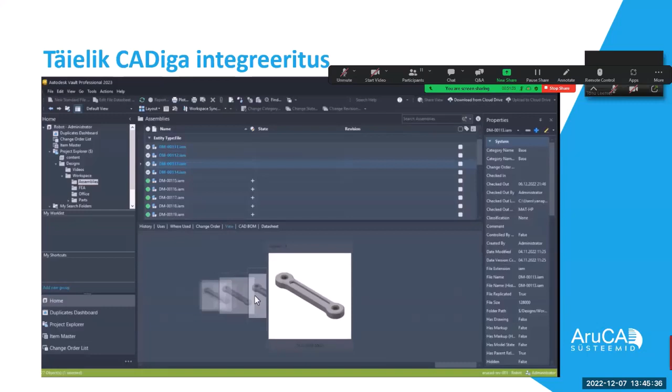Lihtsa käsuga saab hüpata sellesse kataloogi, kus fail asub. Siin me näeme koostu eelnevaid versioone. Iga check-in, iga töö tagasi süsteemi panemine tekitab ajaloo versiooni näol. Me saame alati tagasi minna, neid vaadata või nende peale tagasi minna, kui tuleb välja, et mingi disaini variatsioon ei tulnud meile sobivalt välja.

See info tuleb kõik inventorist tavapärase tuttava praeguse töö põhjal. Selle sisestamiseks ei pea te midagi juurde tegema, aga see võetakse sealt välja ja antakse teile kasutamiseks.

Järgmine võiks olla kiire otsing. Vaatame, millisel moel PDM-süsteem aitab meil faili otsida. Kui praegu te midagi otsite Windowsist, siis võtab see alati mingisuguse aja. Windows peab indekseerima failid, leidma, ja enamasti see otsing käib faili nimede järgi.

Siin, nagu näete, otsinguks sai pandud bearing, ja sellel komponendil oli bearing kirjas hoopis parameetris või properties. Teine viis otsida on muidugi kõikide erinevate propertite järgi, näiteks kui ma panen, et otsi description väljalt bearingut, siis me saame selle konkreetse faili kätte.

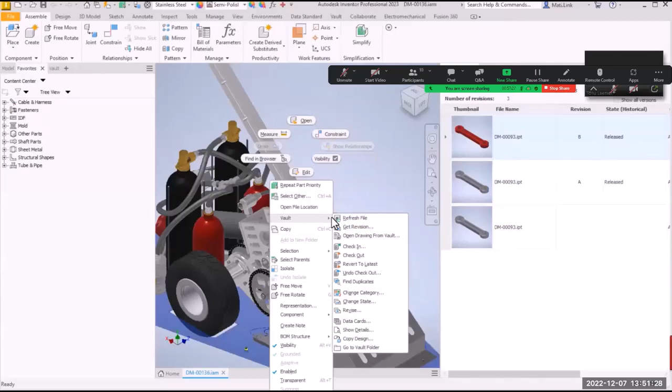See on A revision näiteks, antud juhul oli siis värv teine, ma saan niimoodi proovida ja sättida või muuta selle vana revisjooni tagasi. See on ka üks suur mõte, miks revisjoni teha - see võib olla disaini etapp, et seda uuesti tagasi võtta. Aga nüüd proovides uut revisjoni panna, jätsin siia meelega ühe väikse vea sisse. Süsteem ütleb mulle, et fail on lukus, temal ei saa teha uut revisjoni.

Nimelt siin süsteemis on revisjoni loomiseks oma töövoog ehk workflow. Ei ole niimoodi, et ma lähen ja mõtlen, et täna panen talle revisjooni C, vaid selle annab süsteem. Süsteem vaatab, milline on järgmine revisjon, ja vaatab, et fail oleks sobivas etapis. Selleks, et revisjooni anda, tuleb ta viia muutmise staatusesse. Praegu on ta locked, ehk ta on lukus, ta on nagu heakskiidu saanud ja seda faili ei muudeta. Nüüd selleks, et sellele failile uus revisjon anda, tuleb tema staatust muuta.

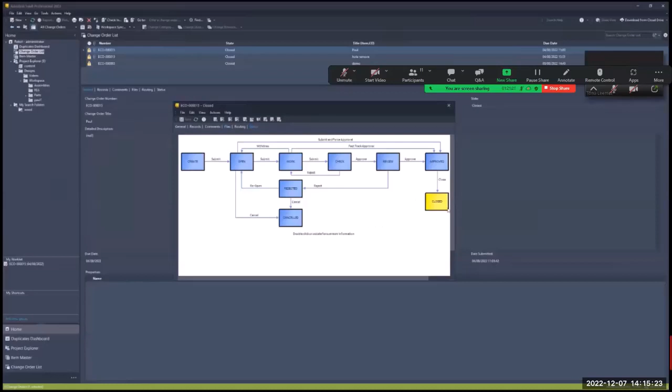Juba me tähele, see engineering change order tekkis kohe sellele, kellele see pandi, tekkis kohe süsteemi. Ja temal ei ole muud üle, kui see asi lahti võtta. Palve ja töökäsk on sees ja nii kiire see ongi, see ava eemaldamine, ja lõpuks on see töökäsk jälle closed etapis. Ja uus revision ilma avata on siin. Ja samamoodi saab siis ka kolleeg oma tahvlis vaadata kohe seda tulemust.

Ja ühena viimastest näitan viisi, kuidas käib PDM-is juurdepääsu kontroll. Nimelt me oleme rääkinud siin workflow'st. Ja workflow üks mõte, esimene suurem mõte, on näidata, mis staatuses fail on - kas ta on töö all, kas ootab heakskiitmist, kas ta on lukus või valmis. Ja ilmselgelt sel hetkel, kui ta ootab heakskiitmist, seda ei peaks keegi enam muuta saama, sest ta on juba kellegi laual, selleks hetkeks on ta lukus. Samamoodi sel hetkel, kui ta saab heakskiidu, kui ta läheb tootmisse, kliendi juurde, ka sel hetkel on lukus. Ehk siis see workflow on siin selleks, et kontrollida juurdepääsu õigusi.

Siin on väike kiire ülevaade siis, kuidas käib nende õiguste panemine. Nimelt siin on ette loodud päris palju selliseid rolle, mis garanteerivad selle, et süsteemis on sinu jaoks olemas kõik valikud ja sa ei pea nagu mõistatama ja testima, missuguste õigustega peab keegi kasutaja siin süsteemis töötama.

Näiteks siin loome uue kasutaja, inseneri, valime, mismoodi ta sisse logib, teeme talle ainult Vaulti jaoks konto. Ja siin on näha siis nimekiri sellistest õigustest. Kui me korraks siin pausi teeme ja vaatame neid, siis me näeme, et päris mitmest õigusest on 2 variatsiooni. On nii vaatajad, administraatorid, on managerid, igasugused tegelased. Need ei ole väga keerulised, selles mõttes igal õigusel on paar rida kirjeldust juures, kõik on helpis olemas. Ja see, et nad on teie jaoks valmistatud, annab teile väga suure mugavuse ja võimsuse selle süsteemi konfigureerimisel, uue kasutaja loomisel ja talle õiguste andmisel.